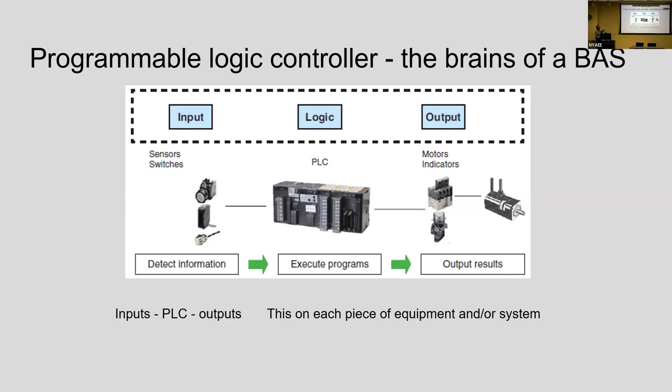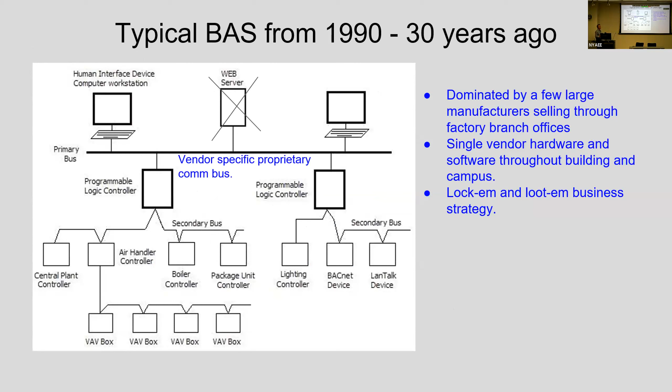Programmable logic controller. So BAS is real simple. We've got a lot of controllers, PLCs, and this building automation system hasn't really changed a heck of a lot in 30 years. Besides the controllers talking BACnet—in the past they talked proprietary protocols—today they talk BACnet, but it's still a fixed programmable controller that gets programmed typically once at the beginning of the building, and it usually doesn't change much in 20, 30, 40 years.

In fact, we're out of Philadelphia, but we do work in DC, Philadelphia, New York City. And one of the buildings in New York City that we work on, there's a controller from Johnson Controls called a DX9100, probably the most popular controller I've ever seen out in the industry. It was very popular—the first controller I ever learned to program in '95 was that controller. We have a building in New York City with about 75 of those still humming along just fine.

So anyhow, not much has changed, but recently, or in the last, let's say, 8 or so years—in fact, probably longer than that—I tell people what sort of changed my mind about building automation systems, and this beyond-BAS stuff, is I saw my first demo of an FDD tool in 2005 from a company called Cimetrics out of Boston. At the time, there were probably only, to my knowledge, and I did a fair amount of research on this, only about 3 FDD tools in the US. They were the early ones. I was so enamored and blown away with that, I thought, man, all my clients need this, but there weren't any that could afford it.

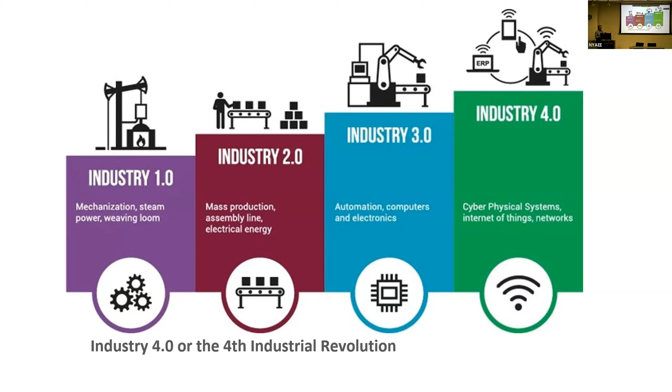And once you have that data connected, trended, and modeled, you open the door for a lot of digital transformation. Applications can use that data. We're seeing this sort of transformation in a lot of industries. The BAS is just one of many. Industrial IoT, BIoT, Buildings Internet of Things, and IIoT, Industrial Internet of Things.

Besides what's happening in the BAS industry, we have cloud computing, so compute power at a much better price point than we used to have. We have time series databases. Years ago, there was one, OSIsoft. Now there's, every few months, I see another time series database, so the prices of those have come down dramatically. So it just made the enabling of this big data analytics sort of movement.

One thing I wanted to mention, BAS historically had a lot of data. They didn't really use it for much, but real-time control. Mostly the BAS's first thing is to just control. It has inputs, it has outputs, it's got a program in the middle, and it's just maintaining temperature, primarily ventilation rates. And that data was typically not trended, or if it was, maybe only 10% of it was. So it wasn't really used for anything else.

This type of technology makes the ability to mine that information for lots of additional things besides fault detection. That's certainly one of them.

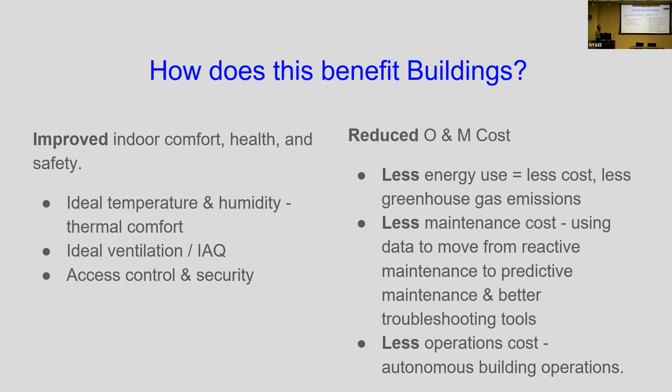So this independent data layer is a fairly recent term that defines what we would call the connecting layer between the building automation system, the brownfield that most commercial buildings all have, and the cloud, or additional applications like FDD, Energy Information Systems. These are acronyms that I've seen over time. I think DOE has this term called EMIS, Energy Management Information System, and it tends to combine all of these other applications under that umbrella. That independent data layer helps enable all of those applications.

In theory, and we're getting there, when you connect to a building, you collect all the data and you tag it, model it, those applications can be deployed at a much reduced cost. Historically, each one of these applications would have to hand map the data themselves, and you'd have to buy, so you buy an EIS. Those used to be standalone. They still are, there's still products like that, but pretty much every FDD tool now has EIS built into it. We're getting to the point where some of these FDD tools are also doing the optimization piece. We're seeing a merge of some of that technology. They were historically all very separate.

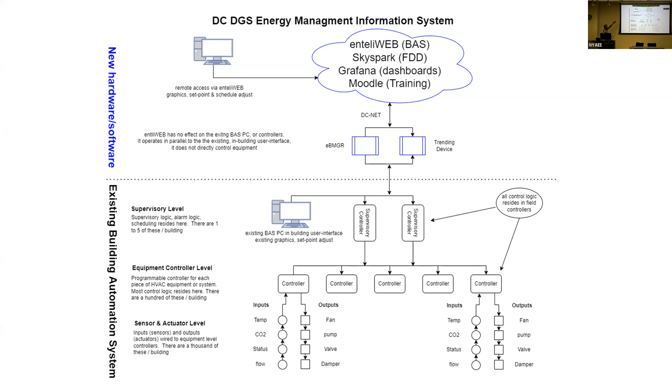Kind of a diagram of what it looks like. This is the existing brownfield system. We connect, and I say we, there's lots of folks like us doing this type of thing, so it is just a common way of doing it. Those are the applications, a few of the applications that we use, but that application list is very long.

Question: You used the word brownfield, it's different from, yeah, toxic waste site. Could you elaborate? Sure. Yeah, so brownfield and greenfield are the two, the contrast.

Greenfield, so I consider an existing infrastructure BAS system, for the most part an existing building, to be brownfield. Greenfield is typically newer IoT technology, oftentimes wireless. We've been embellishing or adding to BASs because they typically are missing some sensors. You have LoRaWAN technology now.

So, all right, I got to keep moving. I'm gonna go through some of these, just more applications that can run on top of that.

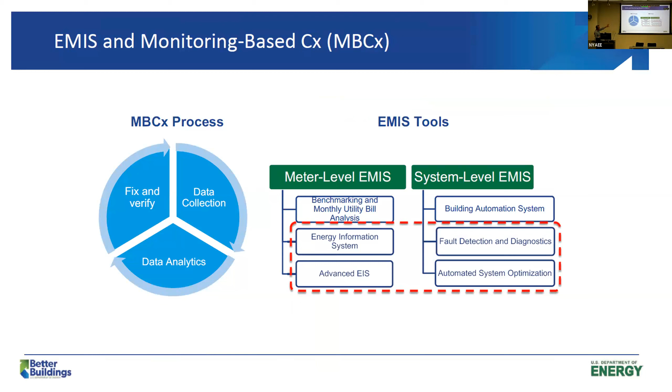These are some slides from DOE, showing big data applications - fault detection, analytics, mining that BAS data and meter data, and greenfield data if you add to it.

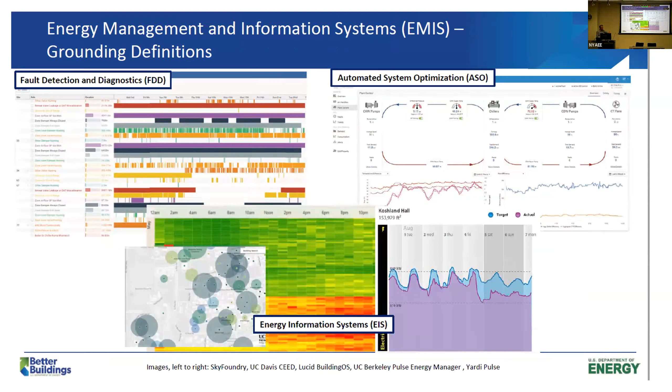This looks at how your building is operating and then runs advanced algorithms to actually write back and control the building better - somewhat like Guideline 36 sequences of operation in an existing building. So if you want to retrofit an existing building with Guideline 36, or we're seeing some folks talking about AI and machine learning, we are seeing some of that. We think that's coming, where buildings will be optimized with some form of machine learning.

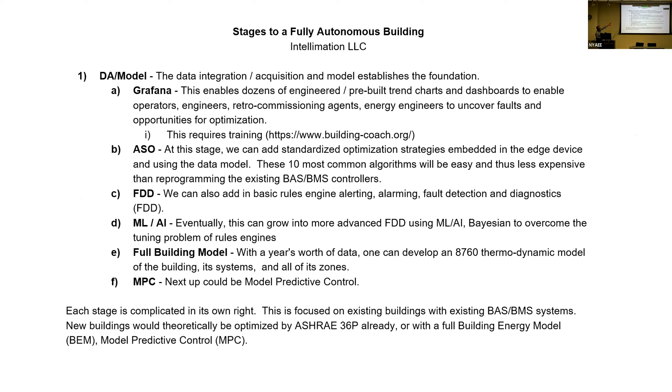This may be a little hype - can we get to a fully autonomous building? I think we're working our way there.

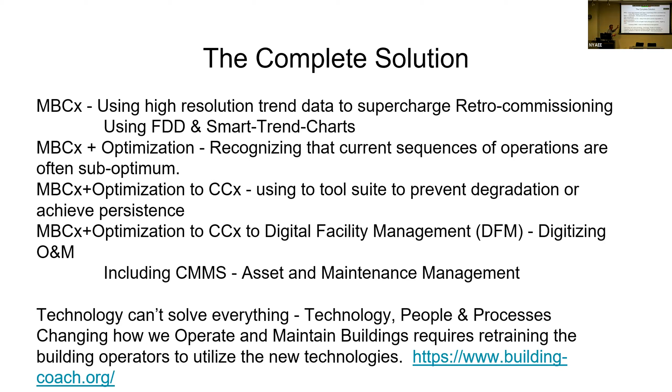A little shout out to CUNY Building Performance Lab and Michael Bobker for inviting me here. One of the things we've learned, and why we're working with them, is that the building operators need to be brought into this fold. You can't turn this technology on without their involvement. So we're training building operators to understand this technology, understand what it does and what you can do with it. I think that's incredibly important because they're the gatekeepers.

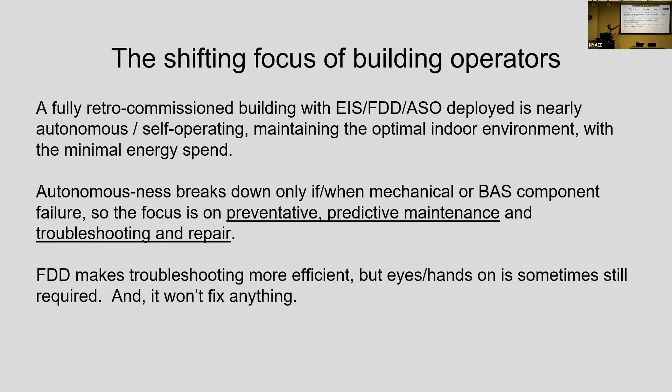We do think that a building could, and maybe in the future will, operate autonomously. What we need from the building operators is to be able to handle things, because let's face it, things do break - sensors go bad, actuators go bad. This is moving machinery, and when it breaks, the automation has got to break. It doesn't matter whether it's machine learning or AI or any of that, it's going to break. So we certainly have to pay a lot of attention to getting those things fixed quicker.

Operator training, I've mentioned that. I think these are some other folks that do that sort of thing.

Michael, how am I doing? On time, if that's what you're asking. Yeah, let me see if there's any other notes here I wanted to really cover.

Just one comment - I would say the average building automation system has 1,000 to 5,000 points of data. So a typical building automation is going to have 1,000 physical inputs and outputs, 1,000 to 5,000, and we've seen buildings with 20,000. So you trend that data every 5 minutes and you save it forever.

There's a lot of wealth of information there that you can mine, and that's how you can know how the building operates. You can know what's wrong with it. You can tell if your mixed air damper is leaking, and that's something a BAS can't do on its own. So this technology has come down in price, and the ability to leverage it, I think, is valuable.

So I think again, 5 years from now - I don't know, the saturation rate at the moment might be less than 10%. We think in 5 years that should be 40 or 50%.

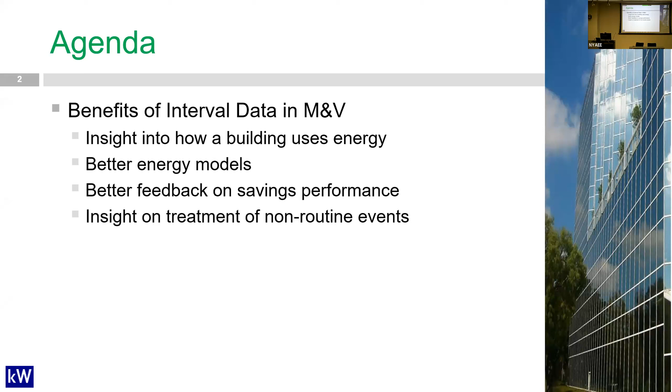So getting going - what is interval data? We call it AMI data in California, an acronym for Advanced Metering Infrastructure. California invested a couple billion dollars in installing advanced metering in all buildings in the state. Previously, interval data was available from time-of-use meters in large buildings, I believe over 200 kilowatts in use. But now you can get it in all buildings, for electric and gas, and even houses. Typically we get electric data at 15-minute intervals and natural gas daily, but in some regions you can get hourly.

But the greatest thing about it, and Terry touched on this a little bit, is that you can access the data. Customers can get their own interval data through an API. In California we call it Green Button Connect, and I'm told in New York you have Utility API, which is an even better version of those interfaces. So that allows a customer to get access to the data and give it to their providers or their energy management information systems and so on - you can do a lot of this stuff online as well.

My perspective is doing energy efficiency projects, however.

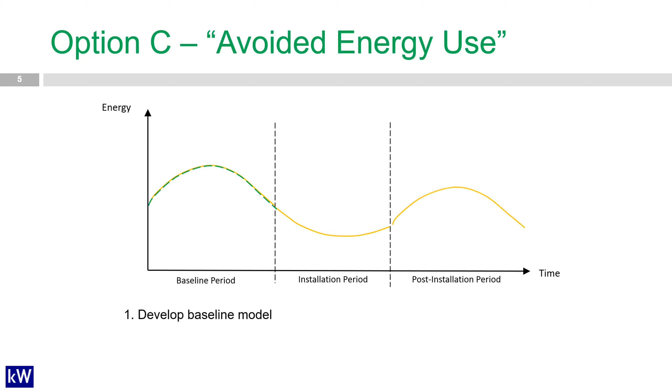To quantify savings, you build a model out of the baseline period. That's the energy use data, maybe temperature data or production data, occupancy data, whatever data you get. We're talking about a statistical model, regression, and then you use that model to predict what the baseline use would have been in the reporting period or the post-installation period. The difference between that and the actual use in that period is your savings. So simple concept, often misunderstood, but that's what we're talking about today.

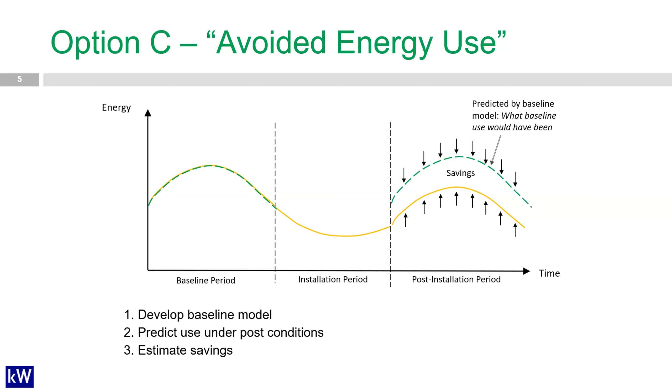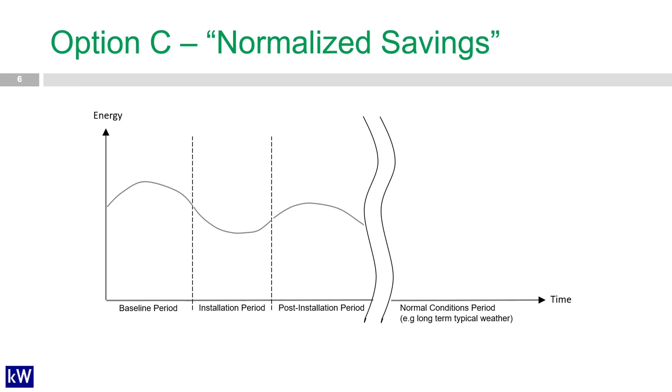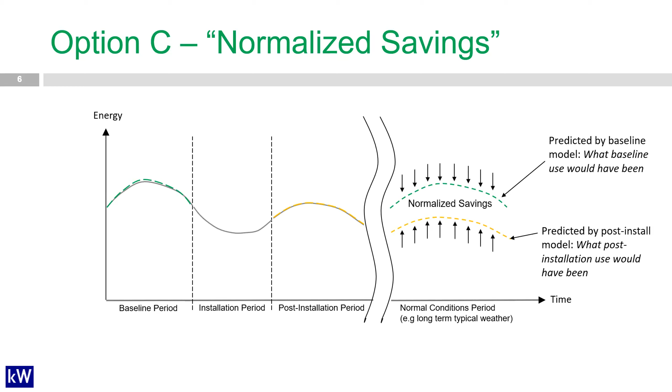We can also do a normalized savings approach, and that's the same three periods, except you have some normal conditions period. That's usually a long-term weather period. If you want to express your savings under typical conditions, in case your post-install period is in an extreme weather year or something, the only difference is you're making an additional model out of the reporting period or post-installation period, making predictions. The difference between those two are the normalized savings. But just to set the stage a little bit about whole building M&V, that's what that was about.

So how does interval data help us, really? That's the question. And the answer really is more data. Anytime you have more data, you can build better statistical models. So if you have better models, you can make more accurate savings estimates.

You use sort of a representative load curve of a similar building or class of buildings, similar to your building, and adjust your daily peak demand by the energy use of that day. It's an approximation, but it's more reasonable than nothing, I guess. Get down to hourly, you can start doing average peak demand calculations. And if you get down to 15-minute, you can actually do coincident demand.

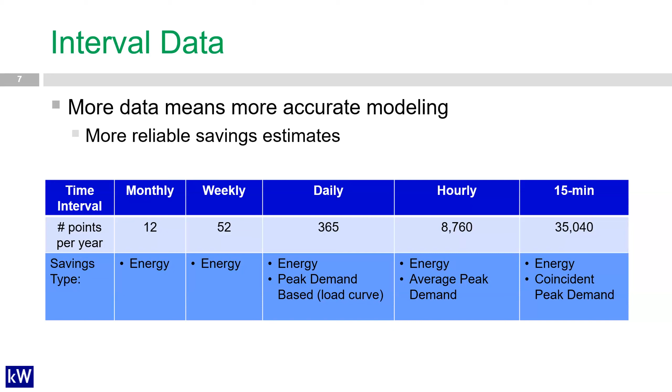Let's see, I only have half my time left, so let me move fast. Option C is traditionally monthly building analysis, 12 points per year, has less accuracy, and you can't account for non-routine events, things that are changing your building energy use that are not due to your measures. I'll explain a little bit more. You generally have to use separate engineering calculations.

Advanced M&V, often called M&V 2.0, is basically the same methodology, you just have more data. So you get more granularity in the volume of data, you get better models, you get fast feedback. You can automate this with Green Button Connect and APIs to an energy management information system platform, for example, really integrating that M&V capability to other things, like what Terry was talking about. It also enables pay-for-performance financing—though I shouldn't say that, you could do that with monthly data as well.

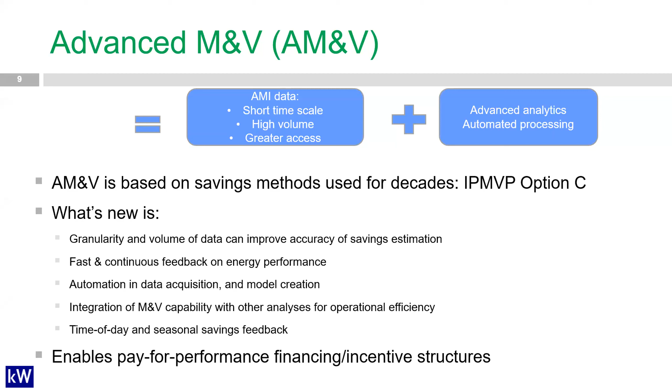It enables to have more confidence in the results of those kinds of incentive structures. Data quality is always an issue.

You've got to be aware of gaps, outliers, repeated values, and timestamps. It applies to all your data streams, whether it's utility data, weather data, occupancy data, or production data. Generally with utility data it's not as much of a problem, but you should still check. Weather data is really going to be the source of your data issues.

We want to use advanced analytics when you have interval data. I'll show an example in a minute. Two of the popular algorithms are the ASHRAE change point models.

There's an example out there to the right, a 3-parameter cooling model, where the energy use increases after the cooling systems have been switched on, and increases with ambient temperature afterwards.

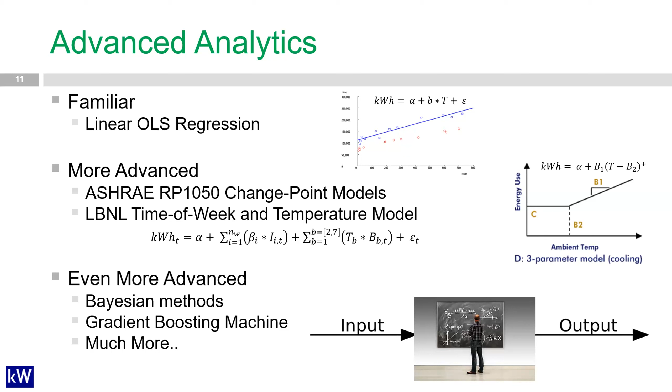LBNL put out a modeling algorithm called the time of week and temperature model, and that accounts for the day of week or the time of week. That could be either an hour of week or a day of week. So you can have 168 indicator variables in your regression model, or 7, depending on whether it's an hour or a day. And then there's more fancy models, but I'm not going to talk about that.

And you always ask yourself, how good is the model? There's various ways to do that. Generally, standards are that it has to meet certain goodness of fit metrics.

In California, we use the net mean bias error. It should be very low, less than 0.5%. The random error, represented by this coefficient of variation, the root mean squared error, should be less than 25.

But really what we should use, and ask the question, is: if I'm going to get X amount of savings in my building, how accurately am I going to know it given this model? So you can calculate the uncertainty using that fractional savings uncertainty formula that ASHRAE provides you. See if you get it less than 50%.

And then the confidence interval, ASHRAE only requires 68%, but we use 90%. It's a little stricter in California.

R-squared is often cited as a goodness of fit metric, but there are problems with it, particularly if your energy use doesn't vary very much with any independent variables. It's pretty flat, let's say. R-squared is going to be poor in those cases, but you can still make perfectly good models out of those. So I have a little trouble with R-squared often.

There are other best practices. In the interest of time, I'm just going to skip over it. Just say that you should have good weather coverage, and your regression should adhere to the assumptions of linear regression. Not saying much more.

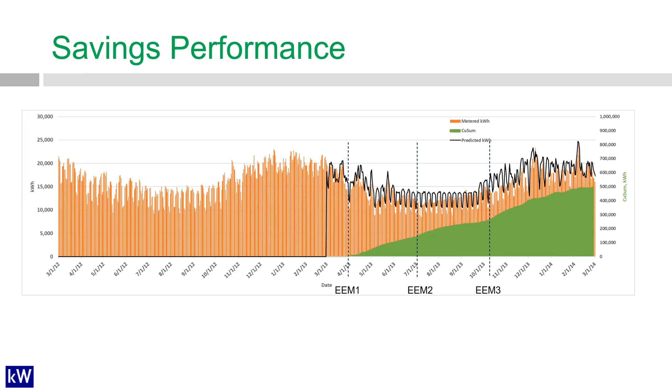You can develop a CuSum chart during the installation period, and it shows you whether you're starting to save or not in the time after that measure is installed, and you can track that and see if you're on track to save what you expect. You can see how, as additional EEMs are installed, the slope of that CuSum chart changes. So it's kind of a diagnostic tool, but it is giving you feedback on the performance of your measures.

There are other energy dashboards we put on this topic also. I want to talk about risks. I have a couple of examples I want to get into.

The risks are the building may not be predictable. So you want to get a year of data, run a model, and see if you can actually make a decent model out of it. If you can't, then it's not a good candidate for an option C approach.

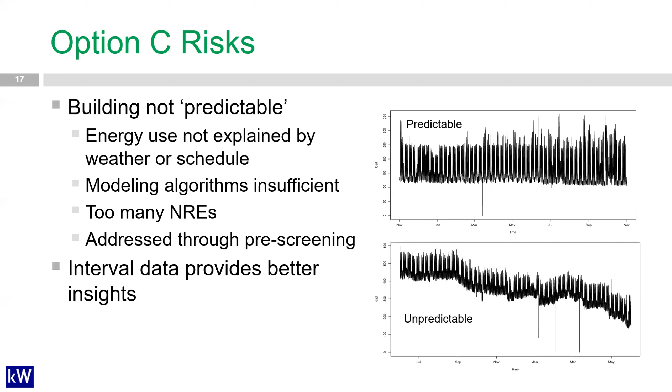But the other risks are non-routine events, and those are events that happen in your building, maybe added or removed loads, that will bias your savings estimate. And you need to be able to handle those because you never know when they're going to occur during the course of your project.

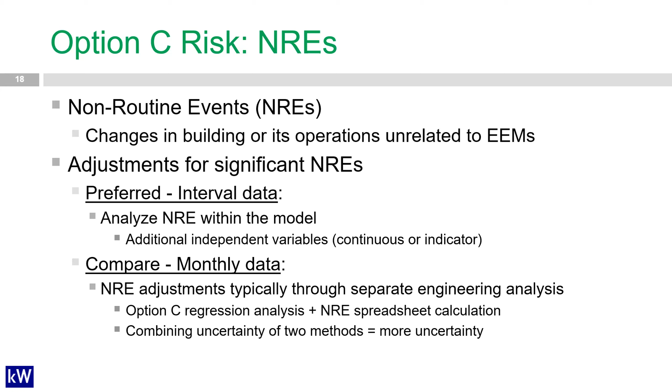Non-routine events are changes in a building or its operations that are unrelated to the measures. You need to make adjustments for large NREs, and the preferred way to do that is with interval data. To do that, you need additional independent variables, which allows you to analyze the impact of the NRE within the model. Just comparing that with monthly data, you need a separate calculation to quantify that impact, and all you're really doing is adding more uncertainty to your savings estimate.

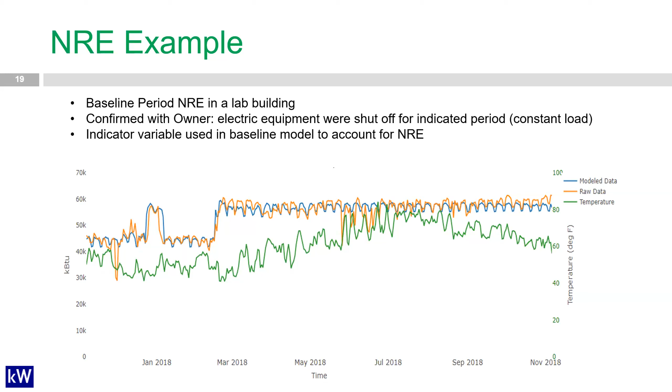Here's a little example. We had a baseline period in a lab building that wasn't very sensitive to ambient temperature, but in the early period it had two low use periods. When we saw that in the data, we talked to the facility owner and found out they shut off a bunch of electric loads during those times. So we confirmed those dates and added indicator variables as an additional independent variable in the model. When we did that, we got a pretty good match between the model predictions and the data. If we hadn't done that, the blue line would be somewhere in between the high and low periods of the actual orange line data. That helped us make a better model and anticipate when that might happen again, so we can make that adjustment in our savings calculations.

So how are we going to do that? During the performance period, we had made this baseline model prior to COVID and submitted our project application, which included the M&V plan and so on. During COVID we asked, how are we going to account for that? So we talked to the building operator, and it turned out that all the fans in that building were driven by variable frequency drives. We could get the VFD signals from all the fans in the theater portion. In the theater, during the baseline period there were rehearsals and events with varying use, and the theater was totally shut off or abandoned during the COVID period. So we used that as an additional independent variable - that variable speed drive data. There were about 6 fans; we took all the signals, averaged them together, and normalized them to 0 and 1, because all we cared about was the variation in the data.

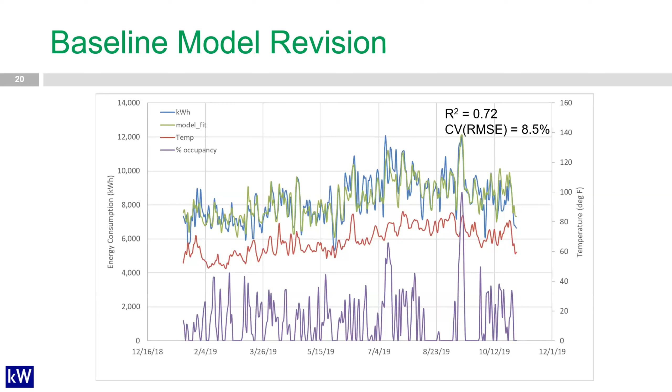We redid the baseline model including that variable. You can see it improved the goodness of fit - the R squared and CV-RMSE values quite a bit. The baseline model fits the data much better than without that additional independent variable. When we did the savings calculation, the black line represents the baseline prediction without the additional variable, and the blue line represents it with the additional occupancy variable. The difference in estimated savings from this project is shown - about 36,000 difference. That was just a nice, fortunate situation where we had the data and could include it in the M&V.

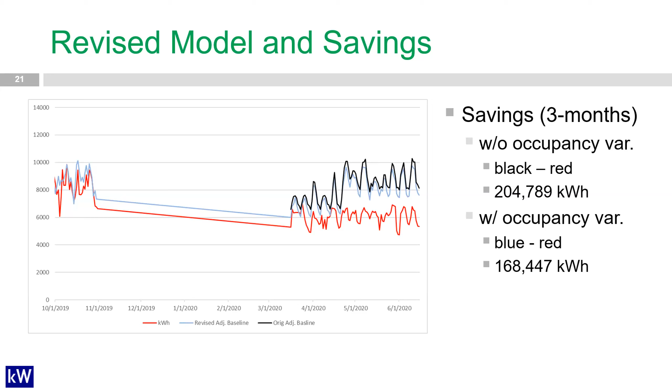These techniques are being built into EMS systems and everything. They take a little more knowledge and customization to the particular building. I just want to show how interval data helps address issues like this and improve the M&V overall.

I want to leave you with a list of some tools you can pick up and use. There's a couple that are free. One is NMECR, which is our code software that our company KW Engineering puts out. It's on GitHub, you can go there and download it for free, and there's information there that helps you understand how to use it. Another popular one is ECAM, the Energy Charting and Metrics tool - that's an add-in to Microsoft Excel. I believe it implements all the ASHRAE change point models. NMECR will do multiple modeling algorithms - time of week and temperature, change point, simple linear regression, and so on.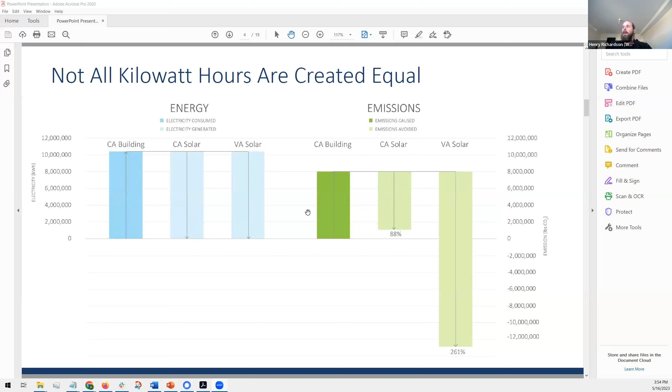And so you can start to see this grid emissions vary by time throughout the day. So you can start to imagine strategies that begin to address this, either shifting strategies - can you shift out of this evening, afternoon peak into this low emissions period in the morning?

Yep. Can I interrupt? Can you discuss the difference between marginal emissions and average emissions, and how people can use those interchangeably depending upon how they're talking about emissions from the grid? Absolutely. Let me think about how the best way to do that is.

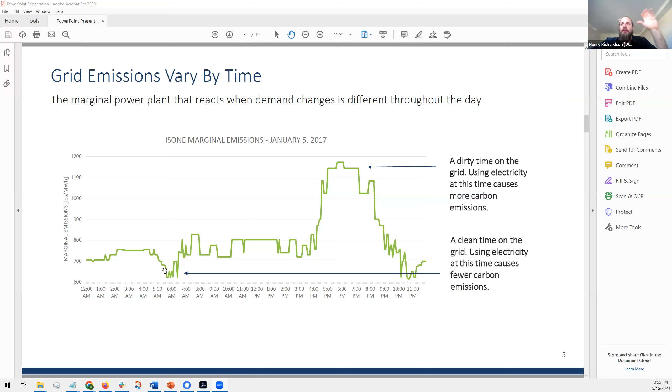So actually, if I start here, what this chart is showing is when you consume electricity, which power plant is responding to that change in load - thus the marginal generator. And that marginal generator changes depending on where you are in the country.

So in California, it's primarily a mix of natural gas and solar. In the Great Plains or the Midwest, it's primarily coal and natural gas. So you can really start to see at different times of day, different resources are responding.

So in New York, that's the NYISO, New York Independent System Operator. In New England, it's ISO-NE. Great Plains, it's SPP. Texas, it's ERCOT. PJM's kind of the mid-Atlantic. This whole region down here in the southeast is really a whole mix of smaller grid operators called balancing authorities, often vertically integrated, like utilities that also operate the grid. California's CAISO, BPA is up here in the Northwest.

And these are the actual entities that control grid operations. So when you say, I need another megawatt hour of power, they tell a power plant to turn on instantaneously to meet that demand throughout the day.

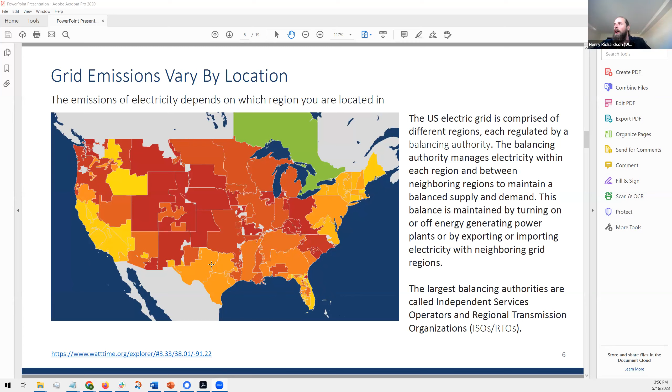No. Yes. No - okay, we're getting mostly no's. So you might have seen like a McKinsey curve where it says the low cost things are first and how much savings you could get from them.

This is really saying each of these bars represents a power producer in the market. So in New York, you have all your wind and solar, probably mostly wind at this point, hydro, nuclear, and they all tell the grid operator, I will produce power at this price. And so what the grid operator does is they take all those bids and line them up by price and say, okay, electricity demand is this high right now.

Everything to the left of that needs to be running to meet that demand. And so if you draw this line over, that sets the market price and everyone in the market gets paid that price.

And so what it essentially does is in the middle of the day, there'll be more solar, but in the evening, the solar will drop out and something else will say I'm available. The fossil resources will be always available unless they're out for maintenance, which happens surprisingly often.

And then all the grid operator does is they say, okay, we have all these different power plants that are bidding into the market. They all tell me their price. We have a certain level of demand, so all of these power plants need to be operating. And then that changes every 5 minutes, and they're constantly rebalancing it to make sure that they're reliably operating and meeting that demand. Am I making sense so far?

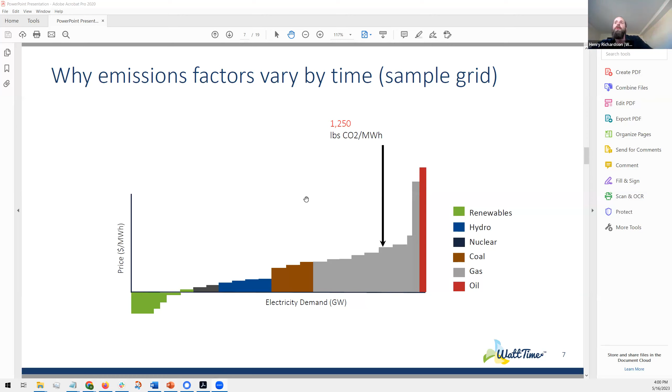In some markets, wholesale price doesn't correlate well with emissions because you could have low cost coal and high cost natural gas, or they could be all mixed together. So wholesale price is not always an indicator of how clean or dirty the grid is, but during exceptionally low price situations, you're probably seeing wasted renewables.

Any questions on this before I go deeper into some of the applications of this data? Excellent.

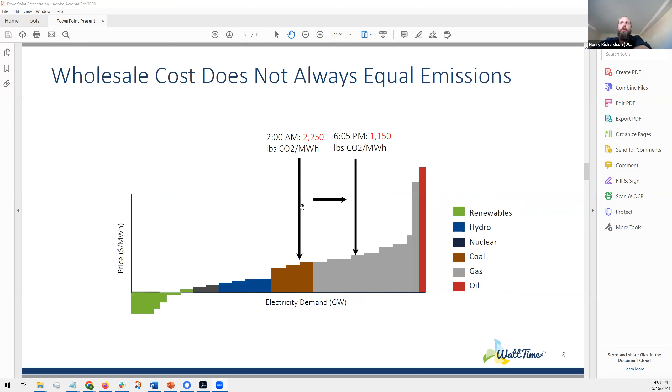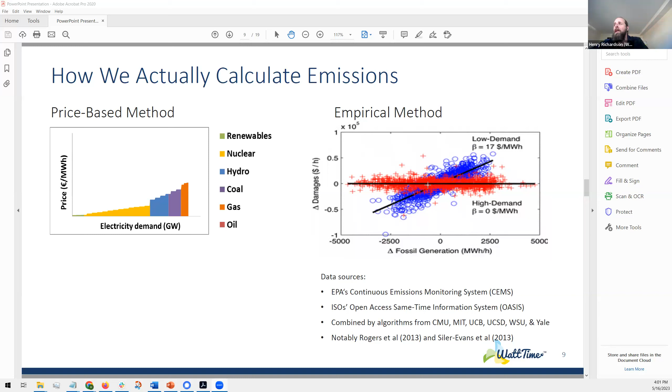This dispatch curve is super clean and clear, but reality is a lot messier, so we use a lot of regression curves and causal modeling to actually determine what that responding unit is in the electric grid, because that's the key information we're trying to find out.

So if more people just put their load in the middle of the day, whether that was through batteries or load flexibility, we could significantly reduce the emissions from the power grid, also significantly reduce power costs. There are many benefits to load flexibility or taking advantage of intermittent demand, so shifting towards a paradigm where we're matching demand with supply instead of, historically, we've always matched power supply with demand.

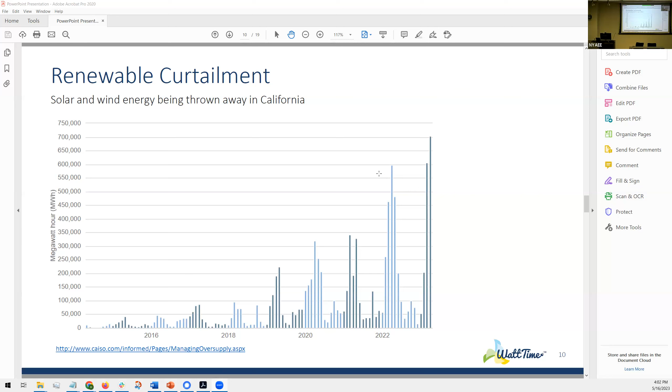Was there a quick question there? Observation, that's why the battery market is very important.

Absolutely, and we're starting to see gigawatt hours of batteries installed in California at this point. And if New York delivers on its promise of, I believe it's like 6 or 7 gigawatts of offshore wind, there's going to be a lot of opportunity to take advantage of time varying emissions.

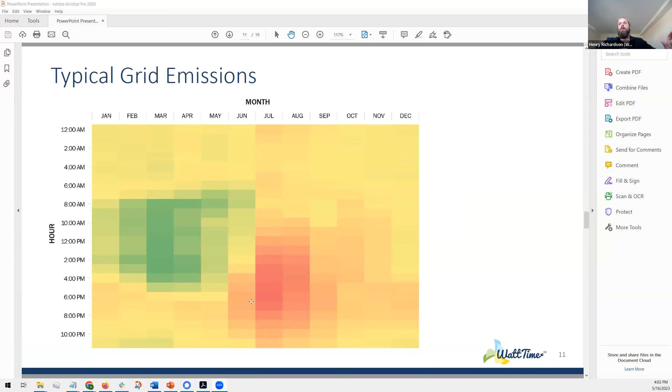I appreciate that laugh, yeah, not at all. And so the question is, how do we start to shape load to begin to respond to these conditions?

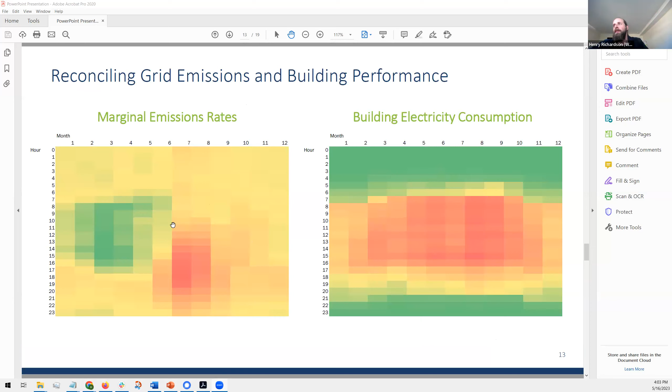We've really identified 2 key strategies. One is, can you design your building when you're building it to have more intelligent systems, shading solutions, passive systems to really better match that grid that we think we're going to have? And then the other side of it is, can we actively control buildings to actually dynamically change their behavior in response to grid conditions?

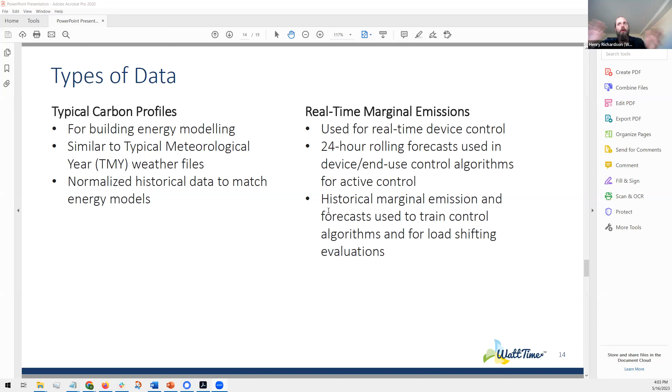Those require two slightly different data sets. On the typical grid emissions profile, I think this audience may appreciate it. A lot of buildings are designed using TMY data, which is great for designing and getting a rough idea of how much energy a building will consume. But that weather data tends to be 20 or 30 years out of date. So you have two different data sets: grid emissions from the past few years and 30 or 40 years of weather data. You really have to reconcile the difference between those two data sets.

So this is just a quick explanation of what people call typical meteorological year. We've started calling it typical carbon year, which is how much emissions there are in any given hour, so you can assess different design strategies against that carbon profile. Just like you have energy efficiency measures, you can assess those measures against their carbon effectiveness. Is installing solar as effective as this system, or is a radiant system more carbon efficient than another type of conditioning system?

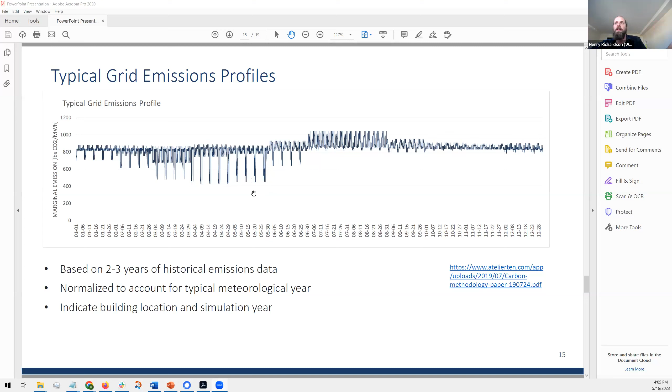So that's one side, on the design side, can you make better design decisions from a carbon standpoint? And then on the other side, is there a way that you can take active control of that building and make startup decisions, pre-cooling, active storage, passive storage, things like that?

This is a much more challenging realm. I think historically, most building operators have been captured in the demand response world, which is a curtailment, occasional-based paradigm where you're like, 12 times a year I'm going to turn off as much equipment as I possibly can to get the most grid benefit or cost savings.

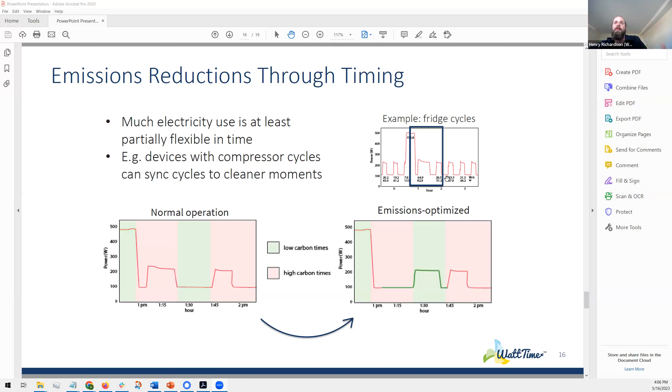This is a more active control strategy, where every day we can make smarter startup decisions about the building. Can we pre-cool it? Can we take advantage of the thermal mass? Can we tune the equipment at different time scales so that you're running certain chillers at certain times? Can you preload air in a room so you can coast through periods? So you can start to see there are lots of active control strategies, but they definitely need to be automated and act every day to achieve real effective carbon savings.

So this is kind of the ideal behavior. Of course, an EV is one of those loads that is super flexible, in terms of you can turn it on and off really quickly.

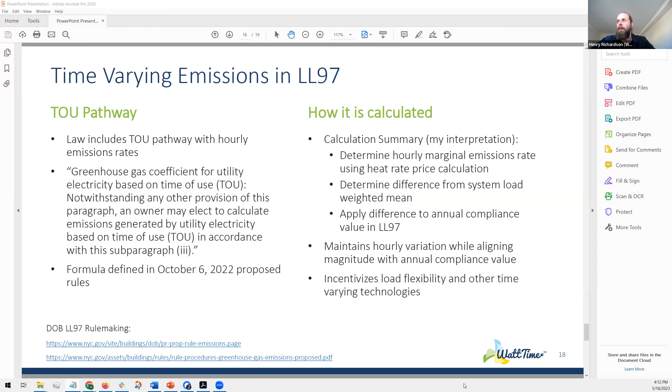Did that all make sense? I can go into any more of it in more detail, but that was really the stuff I wanted to cover here about granularity and emissions factors for the electric grid. Sorry, that was a bit muffled. Was that a question? So thank you, Henry. Thank you, Henry.

Before we go to a panel, if there are one or two specific questions for Henry, we'll go to that. Yes, sir. Yeah, did the time of use carbon—is a price integrated into that? Or do you need to optimize price, TOU price, and then TOU carbon on your own?

Because compliance with the law is calculated through carbon, it's per ton. The thresholds are determined per ton per square foot, I believe. The compliance value is in tons of emissions, but the penalty is in dollars, so you could think of it as a rate in a sense.

If we have a moment, I'll pull up a different slide, but one of the things we have seen very effectively done is if you assign a carbon price to the carbon, you can co-optimize that emissions rate as a price with whatever TOU or other utility rate that customer is on. Let me pull up a quick graphic that explains that here.

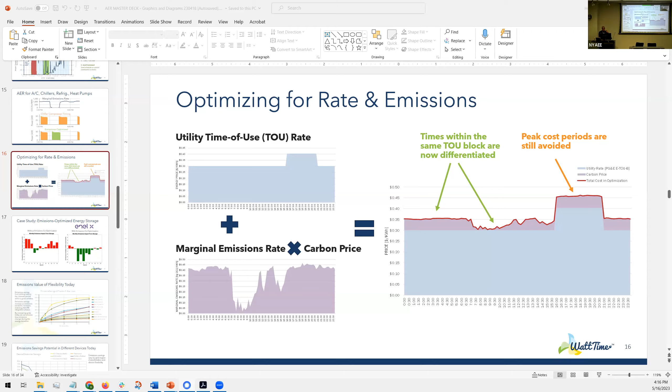As of now, as I understand the law, it's the customer's choice if they want to use a time-of-use option. And they hire a consultant to do this calculation, day by day, hour by hour.

And I'm not sure, you do the calculation, submit it, you can then switch back if you find it unfavorable. Even if you didn't switch back, you would have to take that and submit it to DOB as part of your filing, showing your emissions, not just what you have from Energy Star. The method is involved, but it'll get standardized over time.

It'll be advantageous for people who can shift their loads to probably late evening, midnight, past midnight, where the carbon coefficient for the grid should be lower at late night during normal times. As Henry said, people with ice storage on their big chiller plants, for example, expect to do well with this.